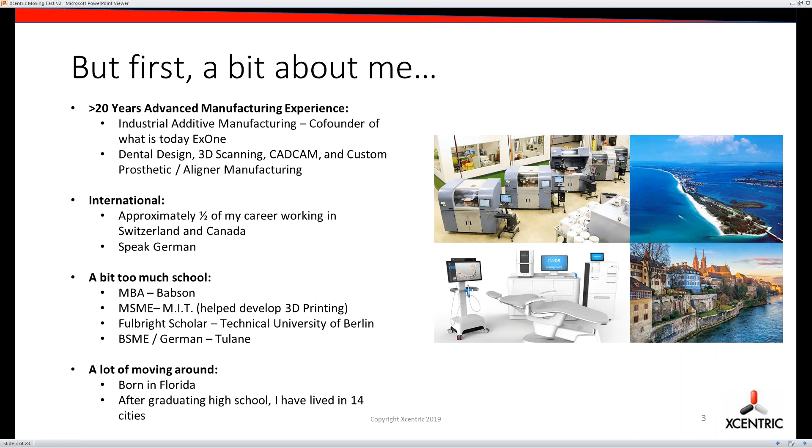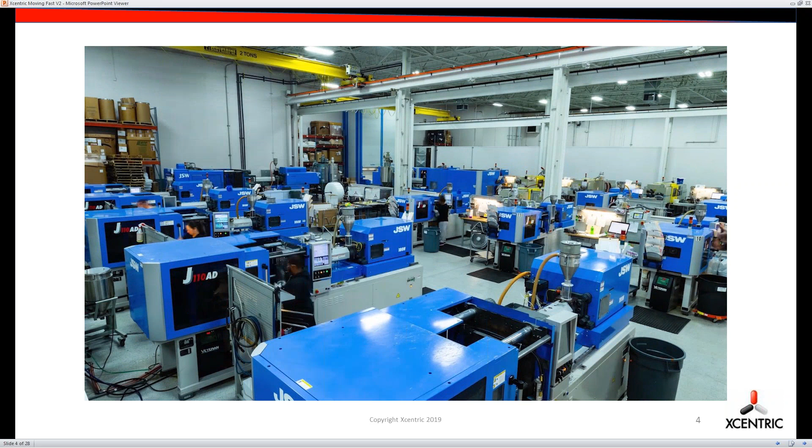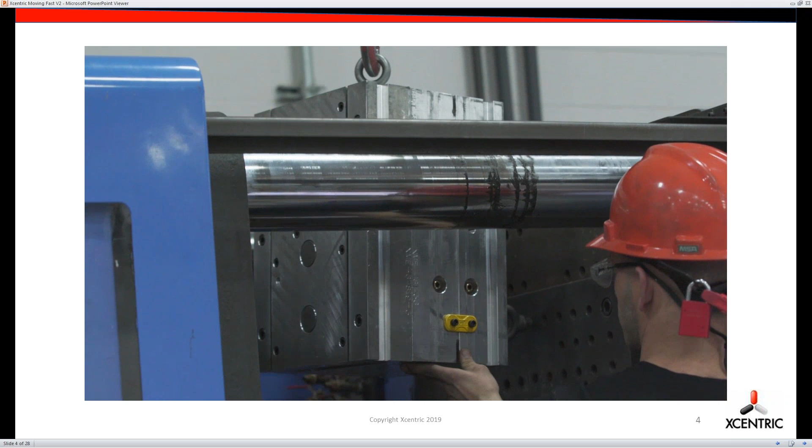So enough about me. Let's move on with the topic at hand. Xcentric is a really interesting company, mostly about the people that we have involved here that are all experts in their fields, bringing concepts together around injection molding, CNC machining, and 3D printing. We use the latest technologies that were developed partially in-house, and I'll talk a lot about those today as we move forward. But what you see in the image here is the concept of combining people, technology, and systems to create great results. And I'll explain how that is in more detail now.

So our vision is to be one of America's premier providers of injection molding, CNC machining, and additive manufacturing, serving a huge range of industries. Our mission is to enable our customers to make the world a better place as quickly as possible. And this concept of enabling our customers is core to everything I'll talk about today. It's not that we're a manufacturer of plastic parts, it's that we're enabling our customers to do some exciting things.

So for example, we help clients make new and exciting medical devices and medical equipment that will save lives. We're helping improve safety and comfort of medical devices for patients and clinicians. We're making next generation transport more efficient, safer, faster, all of those things. We're helping clients increase the performance of their industrial equipment. And finally, we're working with a lot of entrepreneurs to bring their ideas to market.

This idea that we're helping people and helping organizations do new things and exciting things quickly is what's driving us to do a better job every day.

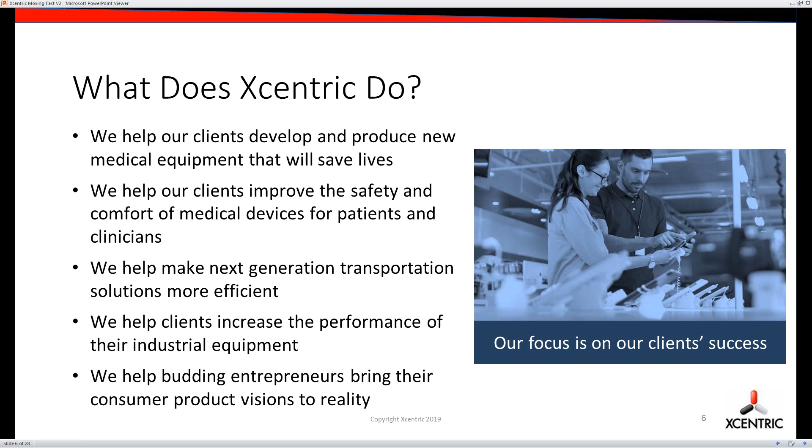Almost every company has some version of this process for bringing their products to market. Some are more complex, some have more steps, some have fewer, some are informal, some are super formal. It's for us to understand this particular cycle for every one of our clients and adapt as necessary to their needs.

To see that we're providing the right service at the right time and the right quality, in the last year we've really been on a mission to change how we operate around this cycle. In the past, we were almost predominantly focused on reacting to our clients' needs to solve a particular manufacturing problem for one part or the other of this cycle. Now we're engaged much more deeply and usually in many more locations along this process, so that we understand our clients, their particular needs as a client, and the particular needs of a project itself and the product that is being developed out of that project.

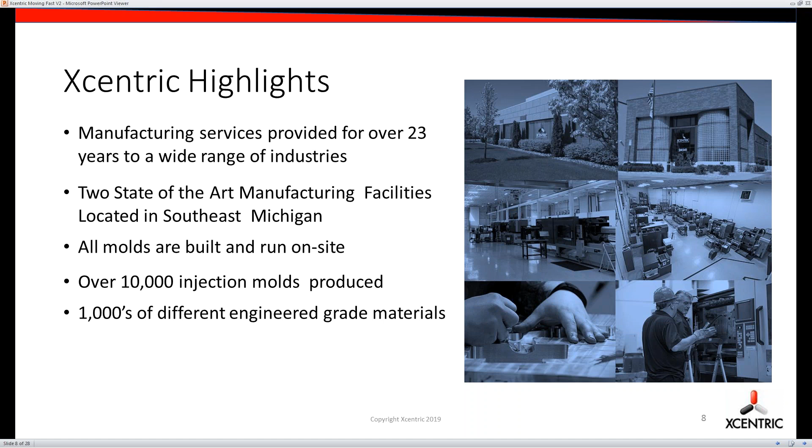We serve a number of different industries: aerospace, automotive, consumer, defense, industrial, medical, and sub-industries within those. A bit of a fact, even though we're based in Detroit, we have a relatively small portion of our business in automotive. That being said, we can leverage the huge resources in the Detroit area for additional partnerships, access to technology, access to material science, access to the leading suppliers of technology that help us provide world-class services that might not be available had we been located elsewhere. That makes this a very dynamic area and a very dynamic industry.

We've learned quite a lot from each of these different areas. All of them have their own requirements. As you can imagine, medical device or medical equipment is totally different than the requirements of a defense contractor and those that are developing components for an aircraft, for example. So we have to be very adaptable. And that's one of our hallmarks, is working with our clients to find solutions that meet their particular need and their particular industry.

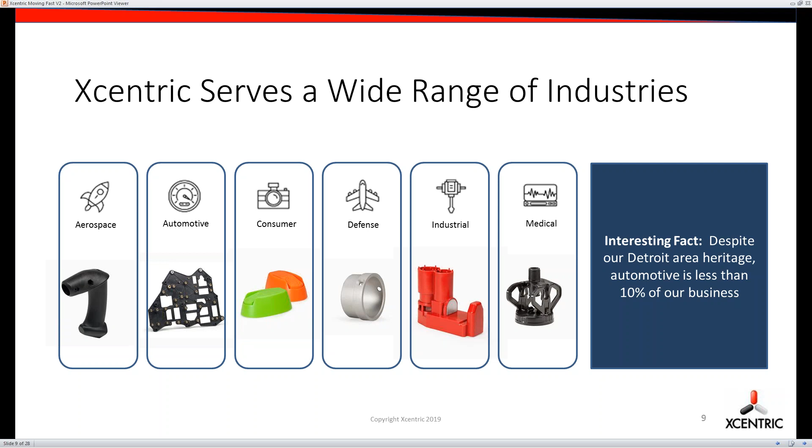So when we look at our services, predominantly injection molding, CNC machining, and additive manufacturing, and other processes related to these. When we focus on injection molding, for example, we do prototype injection molding, low to mid volume production, in-house mold design and production, simple to very complex projects, and we really focus on the customer's needs.

So what does that mean? We're often asked, do we force our clients to work to our process rather than the other way around? This is where it's very important for us to engage with a client about their project as early as possible so that we can discuss design for manufacturability while there's still flexibility. That being said, if there's a particular feature, functionality, material, or concept that the client is interested in, we will do our utmost to make that happen within the constraints of the injection molding technology, for example.

CNC machining, the same. We offer a wide range of materials and a wide range of capabilities. And if we don't have a particular capability in-house, we have access to leading suppliers that can support us in these activities. This is also true of additive manufacturing. As we all know, there's been an explosion in the number of different techniques, technologies, and materials available via additive manufacturing. Because of my background, we are on top of that and always looking to add new partners and new capabilities to support our activities and our clients in additive.

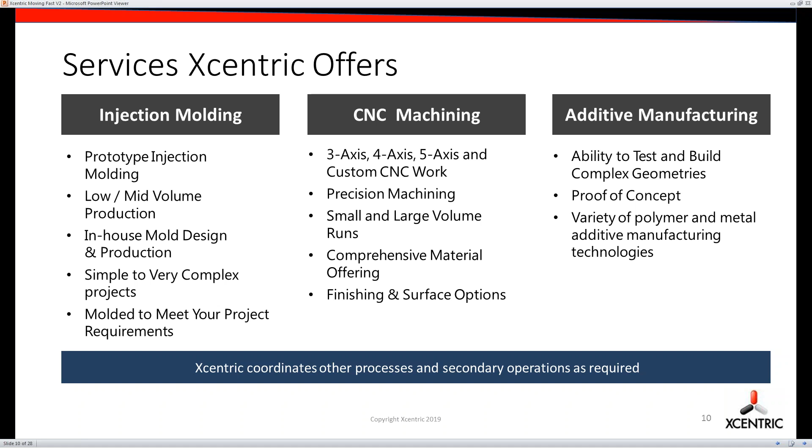Injection molding services, again, we work on simple to complex components. We do basically anything that's normally injection molded. I don't want to spend too much time going into what we do—this is not a sales pitch in this regard. It's more about the concept of being flexible and supporting our customers. So if the client has something in mind, generally speaking we will find a way to move forward with that project.

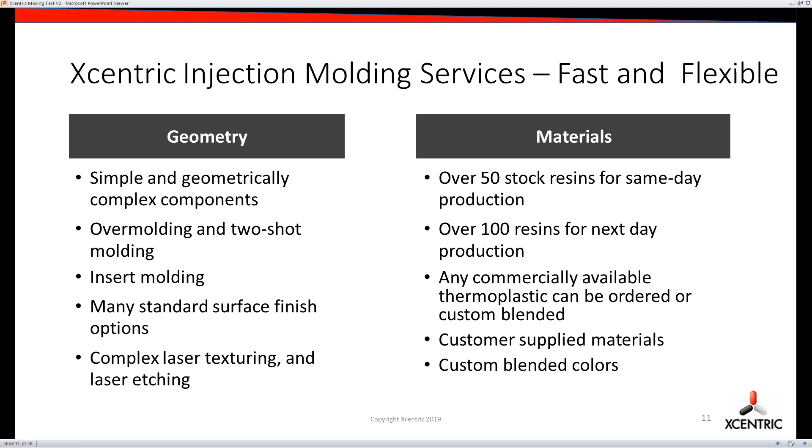So when I stepped back and joined the organization, taking a look at this delivery time, I was honestly shocked that the company consistently was able to do this. When I visited the organization the first time, roughly a year ago, I was immediately clear why we were able to do this. It's not that we have some type of magic equipment that nobody else in the world has. It's that we consistently execute with a great team, with great processes, and world-class capabilities over and over again. That's why we're able to achieve this.

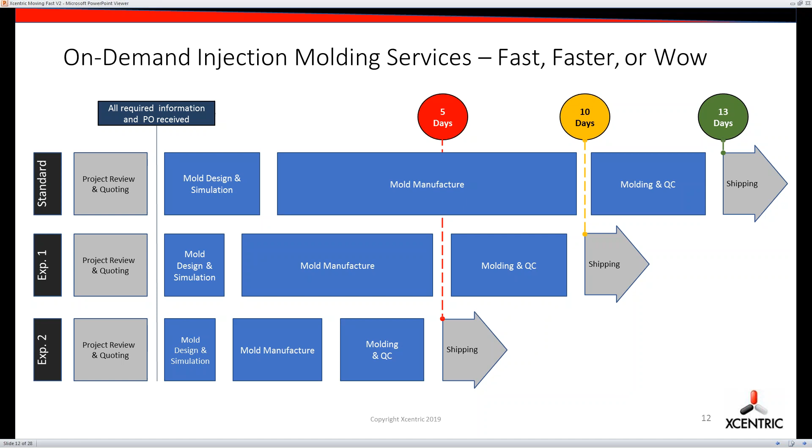I'll talk about this in much more detail in just a moment. So when it comes to execution, it really starts off with team, team, team. Our team is really our differentiator in why we're able to do this consistently, quickly, and with high quality.

This is all about ongoing training. It's all about a continuous improvement mindset. It's all about a customer focused mindset. That's what allows us to execute. Without this, it doesn't matter what your equipment is, it doesn't matter what your process is. You have to have an excellent team that you're invested in.

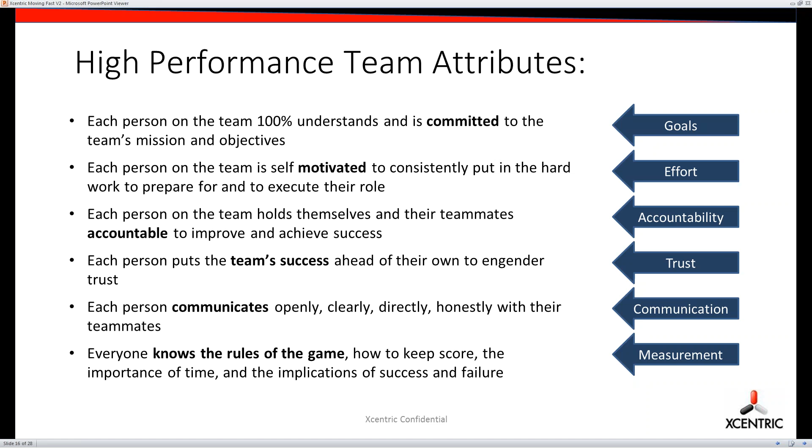So how do I define, and how do we define, a high performance team? I won't read all this to you, but essentially it's about being committed, motivated, accountable. Everybody is focused on the success of the team, the organization, and the client. Communication is key to all of this when you're moving fast. And ultimately, we all need to know the rules of the game: what are we trying to do for the client to see that we're succeeding, which stems from communication, which stems from being committed to the client's success. We talk about these things as an organization because it matters. It really matters to see that we understand as a group what high performance is, and that we continue to raise our game so that we're able to execute quickly with quality.

Related to this, and central to all of this, is customer experience. So recently we launched a program called ACE, Amazing Customer Experience, that permeates our organization end to end. It's all about assuring that we provide the best possible experience at every touch point throughout our relationship with a client. We are always learning, always striving to do more. I'm sure we've fallen short in some instances, maybe me personally. But we are cognizant of this and working on it daily, and it's extremely important to our philosophy as an organization.

We know that when you look at all the different opportunities to interact with a client, it's not just about the central activity of manufacturing components. It's about all the touch points, whether it's with Mark's team on the marketing side, following up with customer support, our advertising, everything that we do that has a touch point with you or one of our other clients is important to us. As we move forward, we want to be so convenient and so trustworthy as an organization that we continue to earn your business over time.

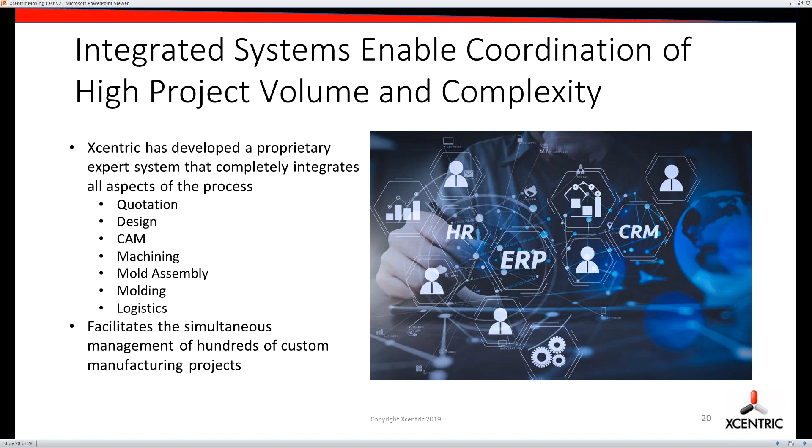We're running hundreds and hundreds of simultaneous mold development and molding projects at the same time in our two plants. If you noticed in the video earlier, we have an extremely busy shop floor and design department. For most injection molding plants, generally speaking, it's relatively automated with relatively low human interaction over a typical day. In our case, there's a huge amount of action and turnover from one press to the other, one project to the other, one mill to the other, to manage all these projects. That's only possible when you have a fantastic system keeping it all straight.

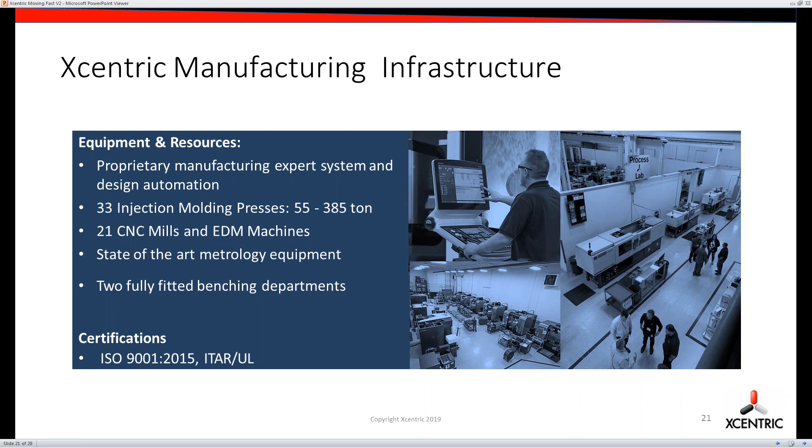As I mentioned, we have this proprietary system we call XMVM. We have a number of injection molding systems in-house, CNC mills, and EDM machines. We have two fully kitted out benching departments—benching meaning those that finish the molds and apply texture to the mold. If there's capability we need that isn't on the list, we go get it in the neighborhood, so to speak. As I mentioned, Detroit is fantastic for this. This image shows you a little bit of a typical day in one area of our molding department.

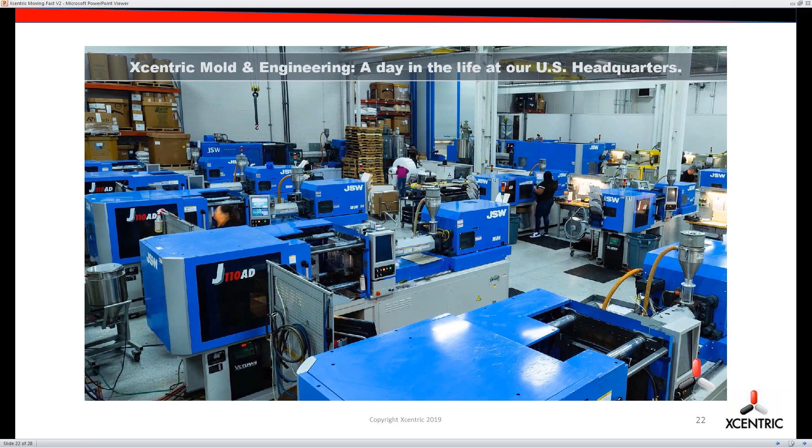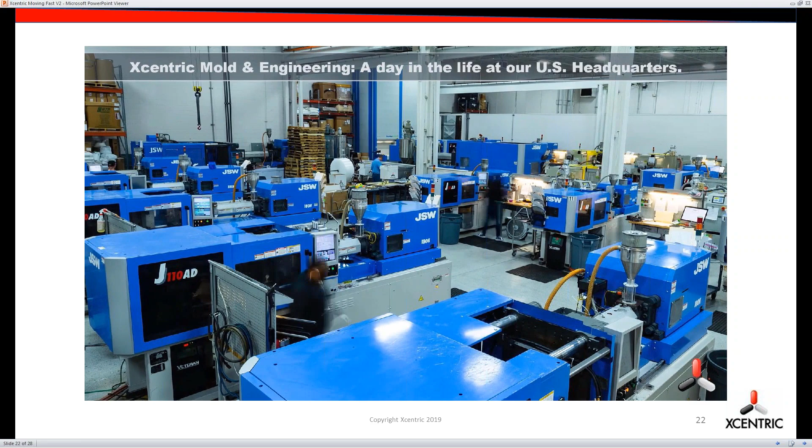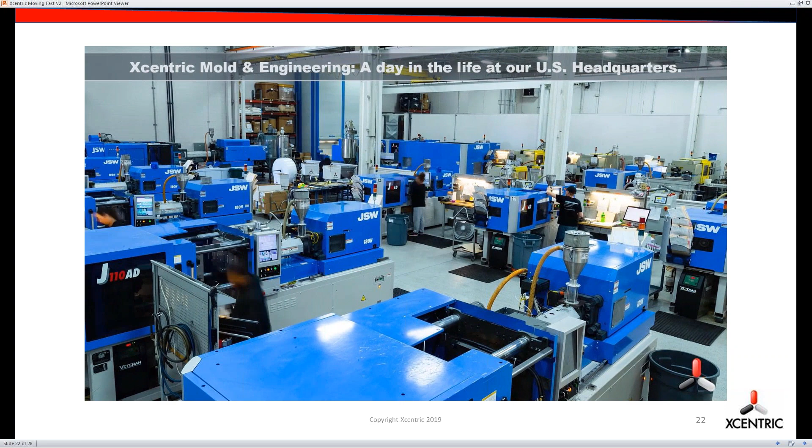As you can see, constant activity at the presses, constant movement between the teams, loading and unloading product, doing QA, putting in new molds, exchanging molds, on and on and on. So we're an extremely busy shop in terms of the level of activity and the level of human interaction and involvement to see that our projects go off efficiently.

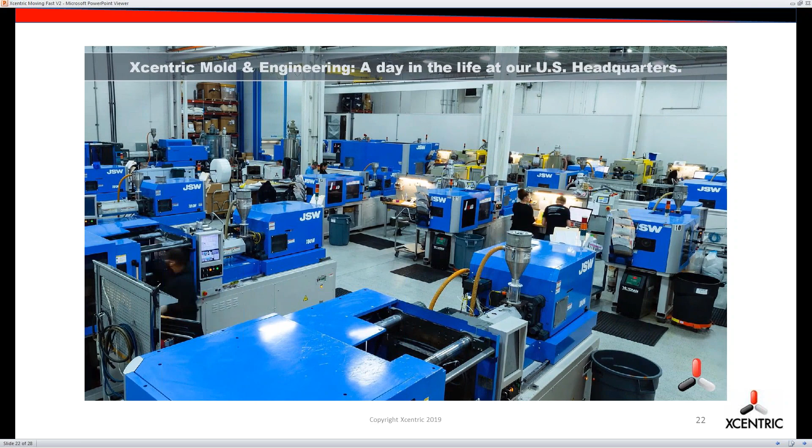On top of that, you may notice in some of the images, you'll see computer screens at every station. Those screens are tied into our expert system that are giving input based on the parameters that should be used for the process and feeding that information back to the expert system so that we learn from one project to the next.

So next, it comes to process optimization and streamlining. I happen to be a Formula One fan, and one of the more interesting designers from years past was a gentleman named Colin Chapman. One of his most famous lines is simplify and add lightness, meaning basically anything that is not necessary for going fast, holding the wheels where they need to be, holding the driver safely in the car, take it off. Basically, if you had to distill our philosophy around our processes, this is how we act.

So the founders and the team continue to look at what we've done in the organization from an injection molding or machining perspective and streamline every aspect of the process.

That starts with communication. If you don't know exactly what the client is after with their particular project at that particular part of the timeline, you can't streamline anything downstream from that. So we start there. We assure that we understand the project, what the objectives are, how success is defined for that client and that project. It may be two different definitions of success from one project to the next. Align on that, make sure we're clear, and then we go fast.

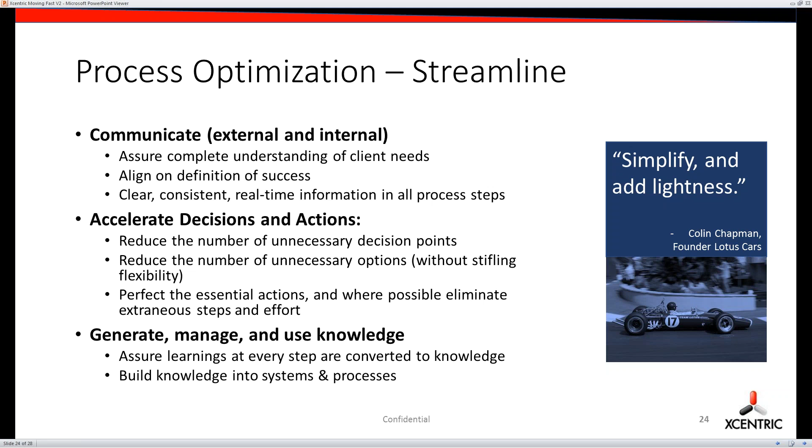Why is that important? Some of our clients, after their prototyping projects, will come back to us and ask us to run 20,000 more parts. We need to have that information from the initial trials, feed that in, optimize the process, quote out the production run, and off we go. So again, it's about communication, accelerating decisions and actions, and then managing knowledge. All those things together help streamline our process end to end.

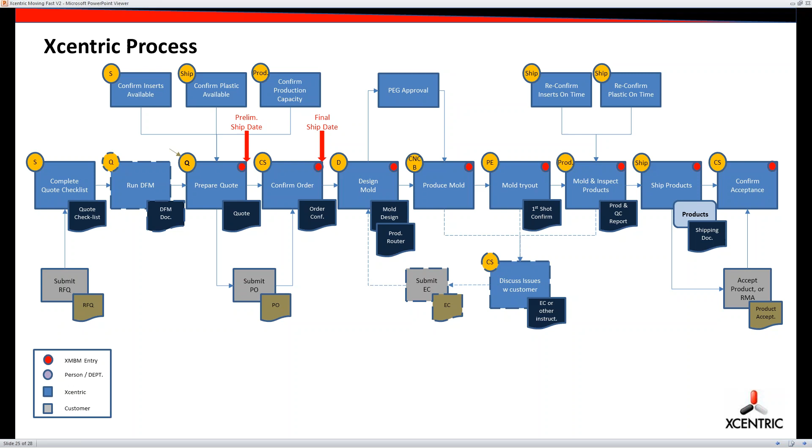So when we look at the process, wow, there's a lot going on here. A lot of moving pieces, a lot of steps, a lot of communication points, a lot of documents, on and on. As I mentioned, we don't cut corners. We have not skipped some step in the traditional mold making process. We do everything that's normally done to produce a mold.

For example, we may have a consumer product project where the aesthetics of the surface is extremely important, so we will spend more effort on that particular project based on their instructions to put a higher finish, usually that costs more, on the surface of the tool, and we will package the components in a certain way. The same client may come back a week later and say they have an internal product where surface finish is not important, we don't need that level of polish on the tool. That saves us a bit of time, we move faster, but it's all about communicating and understanding each project to have the right outcome.

When it comes to accelerating decisions and actions, if we look at this unified system end to end, all the information is always there throughout both of our facilities for management and all of the team members on the floor. We look at design optimizations and macros. If we look into the design step, we're typically finished with a relatively straightforward mold design in less than a day, in some cases just a few hours. The way that's possible is we use a number of macros pre-programmed into our design systems that take into consideration exactly what we can manufacture and exactly what we can mold downstream. That saves them time. They don't have to think up new components or design a new component completely custom every project. They go straight to what they need, pull it from a toolbox that's already proven to have worked hundreds and hundreds of times in the past, use that design element, and move on.

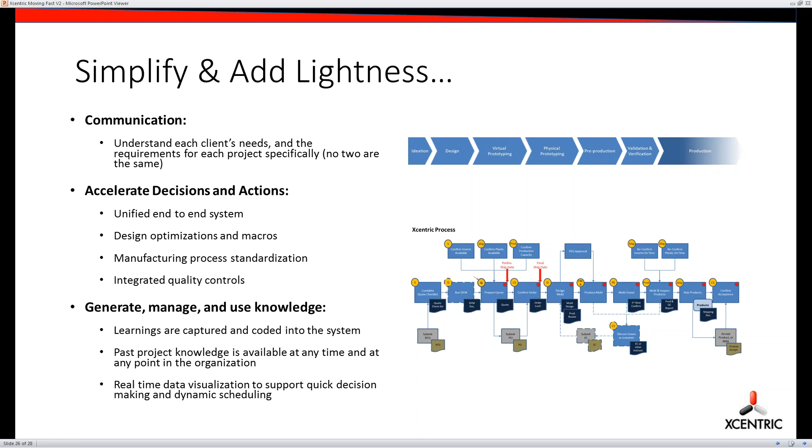Of course, all of this is constantly being improved. We will never be finished with this. We will always be working to make it better. Even in the organization I was running in Switzerland, you can imagine how precise the Swiss are. This was about a $1.5 billion organization. We had every possible resource, and we were still working on improving all of these things. This never ends, and we have that mentality here.

So, the key takeaways for today: we're really focused on supporting all of your missions. It's about what you're trying to accomplish, not just about a plastic part. It's about what this part becomes later on. Is it helping save a life? Is it helping make a car more efficient? Is it helping somebody enjoy their life more in some way? We're focused on that and on seeing that you succeed as an organization, and that we play an important role there.

We try to tailor our services to see that they meet exactly what you're after, and we strive to do better every day. Then finally, how is it that we do all this? Again, it's about our team. It's about our customer-centric culture and these systems and processes that we built over the last 23 years to execute consistently to your needs. So with that, thank you very much.